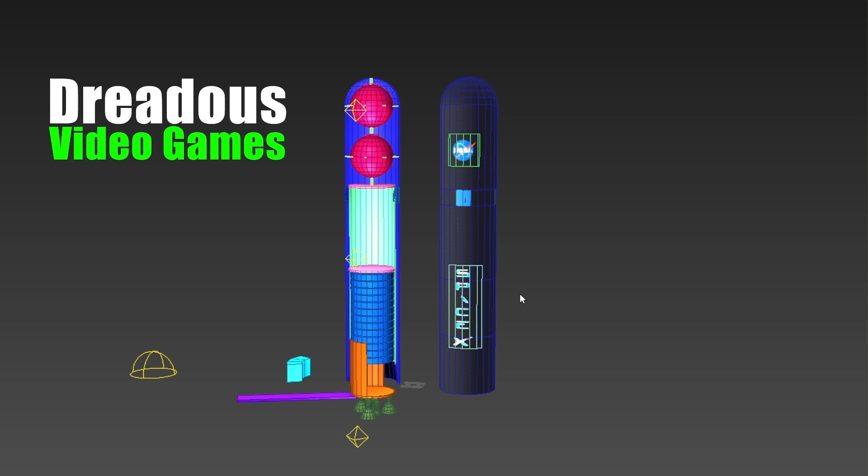I'm surprised as to how many people checked out my last video where I was showing off some cool idea. One of the things that came up in my feeds was an interesting video, and I just want to show it real quick.

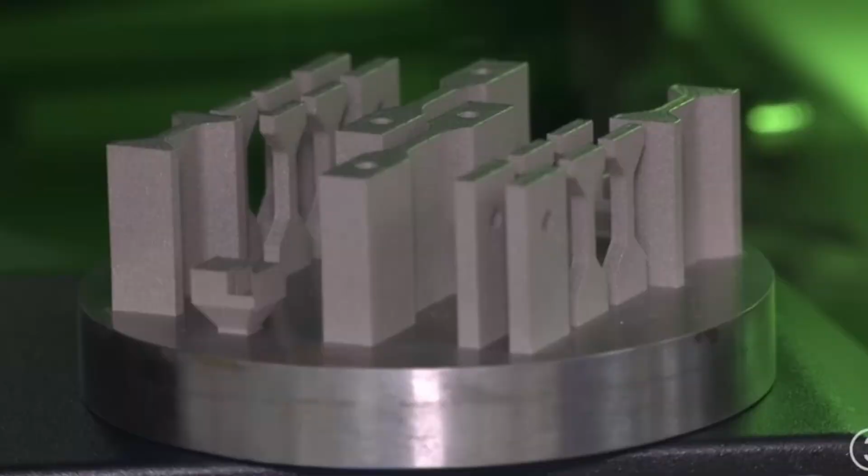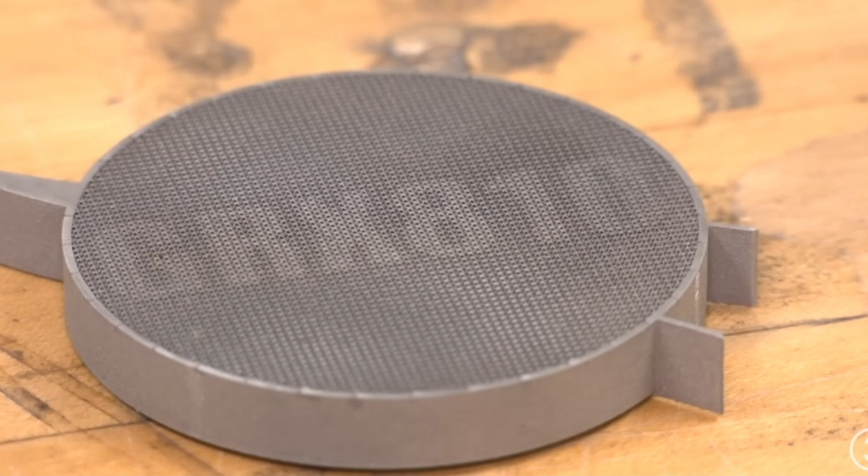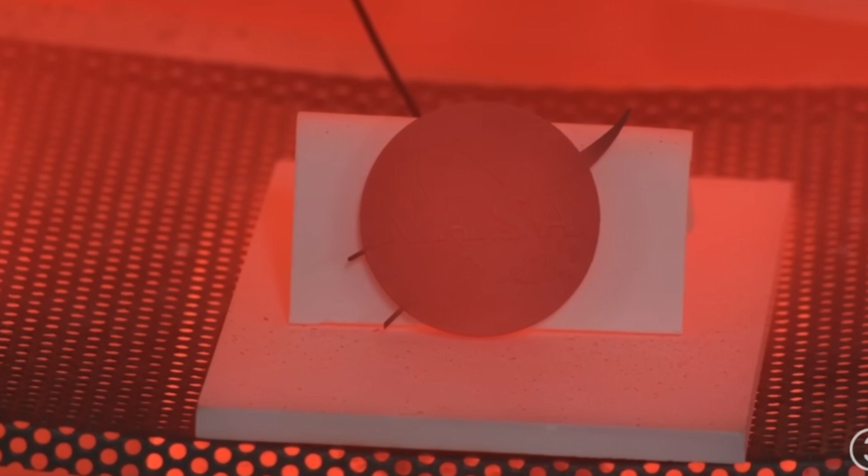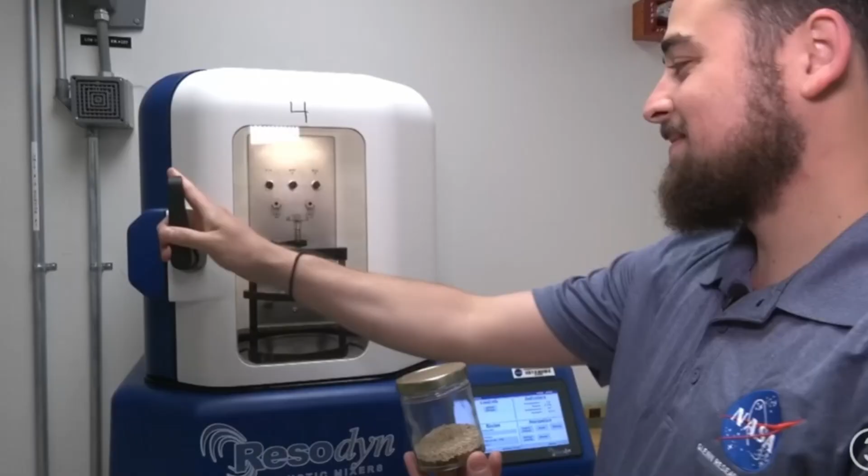NASA Glenn engineers Chris Kantzos and Tim Smith can now call themselves inventors too. They are the minds behind NASA Glenn's breakthrough material, a super alloy developed for extreme conditions of air and spaceflight. It's called GRX 810. In a rocket engine, you can go from 0 to 1,000 or 2,000 degrees within a couple of seconds, so we need a material that's robust and reusable. That's one of the big selling points for GRX 810, it can stand many reuses. It all begins with a metal powder inside a 3D printer. A laser melts the extremely thin layers together. Slowly, a part is formed. The true test is heat. Temperatures that would cause other alloys to fail is no problem for GRX 810, making it ideal for stronger, more durable parts in rockets and airplane engines. The secret? The metal powder is coated with a ceramic before it's printed. But this happens at a nanoscale level. Particles so small they use sound waves to get the correct mixture.

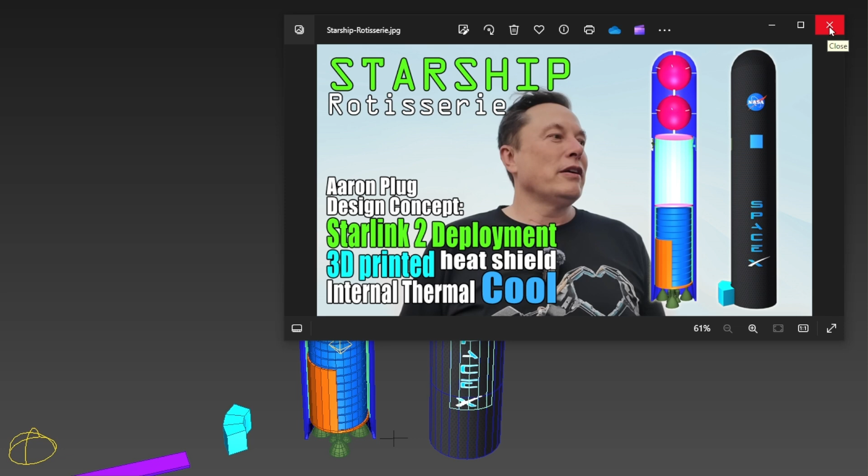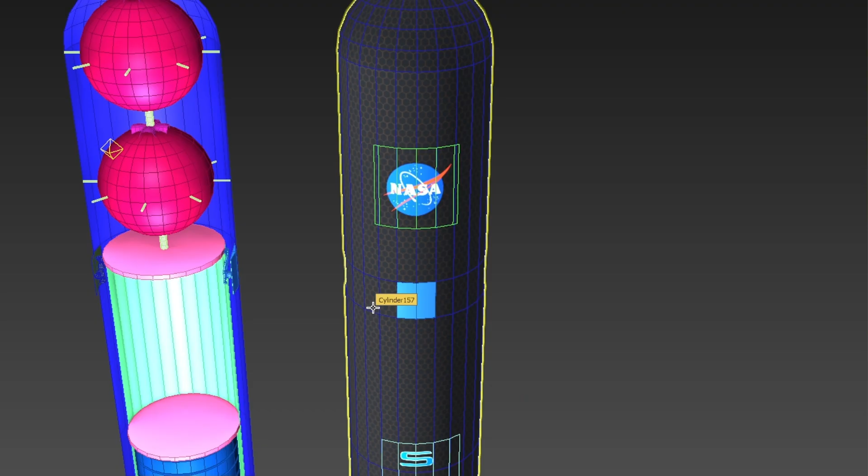So that video ended up coming into my feed soon after I had posted this video on YouTube about 3D printing the exterior of the rocket, or using like a 3D placing device with a 3D printer mixed in. Now I don't know if that particular application is going to work, because they said it was like a metal and a ceramic that's kind of molecularly together. So the metal will probably end up being the weaker point, and I'm not really sure how that would work in this respect. One thing's for sure, speed is a factor when it comes to reuse and being able to do maintenance on these sorts of tiles.

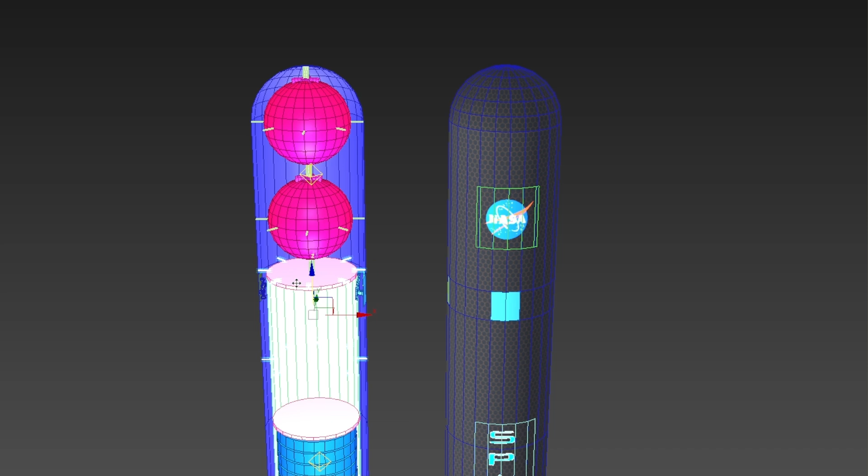Thanks for commenting. Someone mentioned that it looks like the rocket would vibrate while flying, and so I only posted it with these supports, but you could put tons of supports all the way through this thing. I just didn't want to clutter it with supports showing where all the support points would be, but you would end up putting little pins and wires.

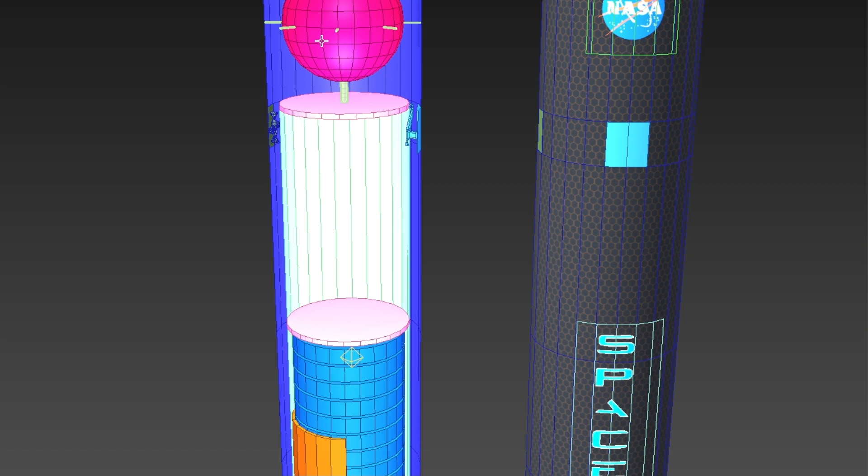The concept would be kind of like a bicycle, like the rim on your bicycle wheel, like this particular rim right here. So imagine the tank is in here, and you just have these wires woven all throughout the interior of the vehicle, holding the tanks and creating a support structure that goes all the way around, ending up like a double layered support wire structure. So I didn't include that.

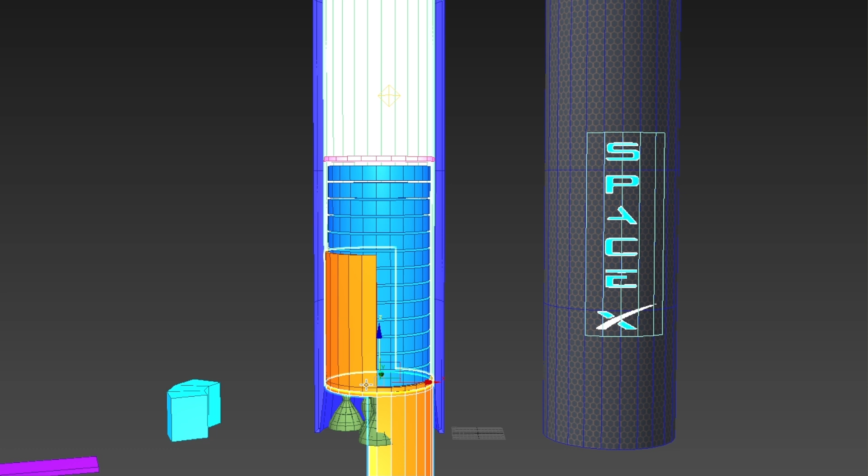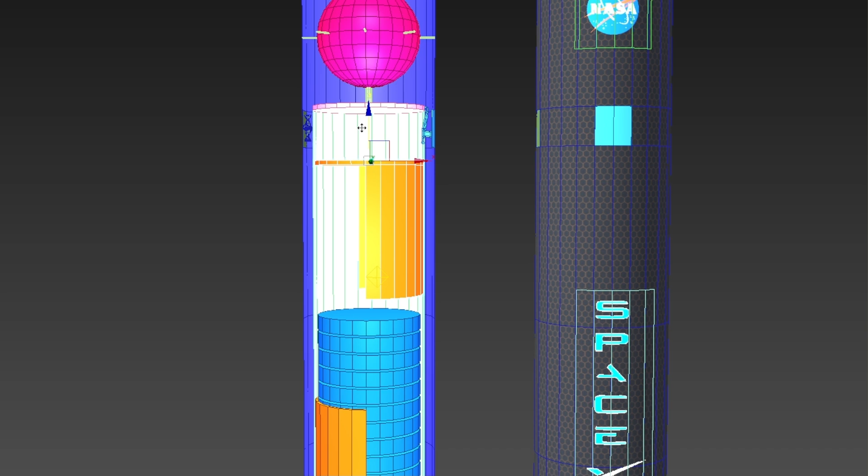One of the things I was curious about, and I have no idea if this is possible, but when I was watching the video I was thinking it'd be so awesome if, let's say, this here is the methane tank, and this could be a piston that pushes the methane tank and empties it. By the time you're in space, you only have a little bit of methane left for the final burn. That would save the helium you'd need to pressurize the tank.

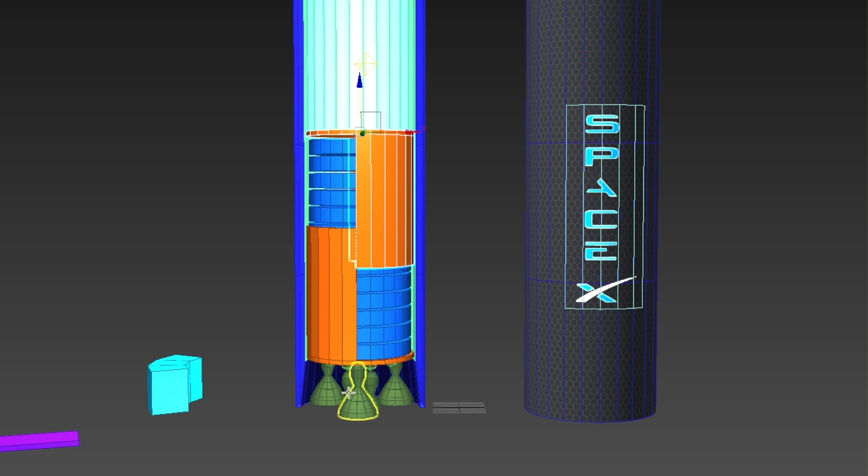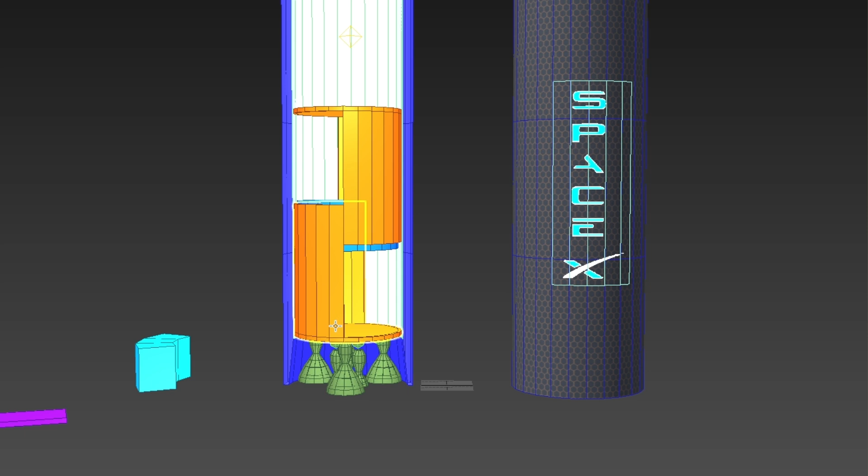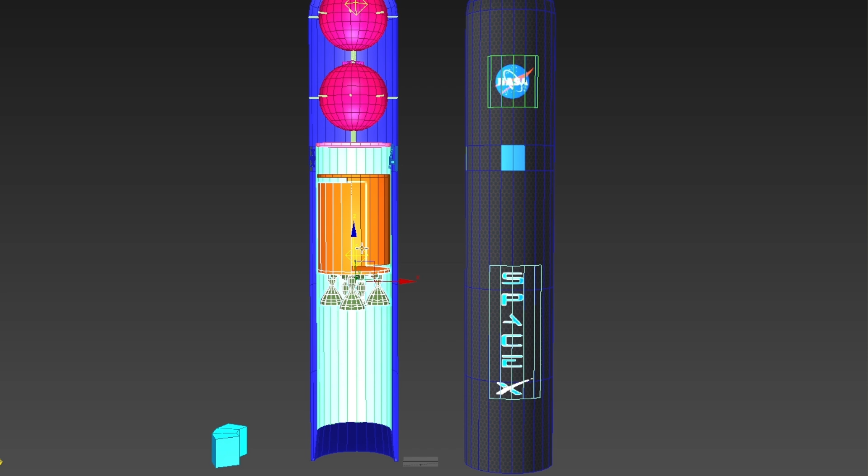The idea is you'd use it like a big piston. Also, Elon mentioned that the rocket wants to come in butt end first because that's where all the weight is. I was thinking that once all these are out of here, this whole thing—so if I took the payload out, or at least the majority of it, and moved this up, you could maybe position the rocket bells further in, and then this whole thing could slide, acting like a piston. Once it gets up there, we leave that one there, and it's flying in, and this could go up and down inside the chamber, allowing the unit to use it as weight or balance or counterbalance.

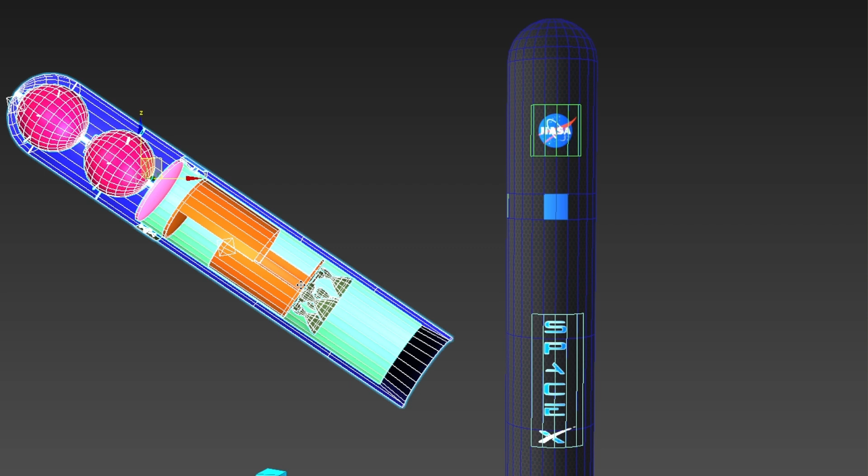So this could be up in the body, and that would end up pivoting the whole rocket, moving it further up into the chamber in order to move the center of mass up and try to get it to tip over and come in on the Earth at this angle. So this is all speculative, but I'm going to show you the next iteration of this design.

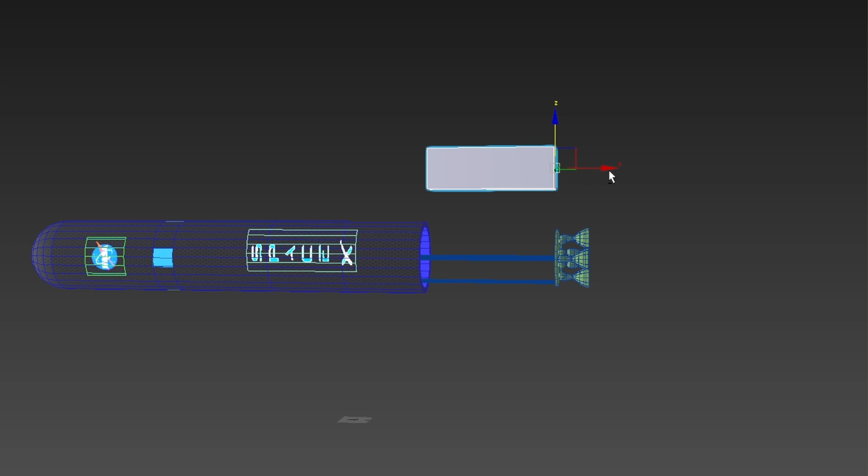We're going to talk about the Starship, and the real question is: is this actually a Starship? When it's in space, it goes sideways. So here's the payload - this thing comes out to about there, and then the payload comes up and out of the machine. So this is a 5x5x15.

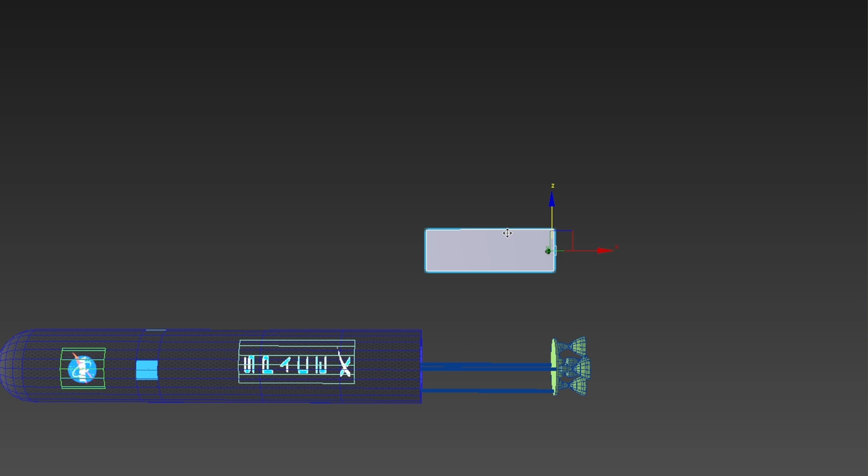Now, you're in orbit, which means this here is not necessarily - this is a construction piece. So another vehicle, like a little vehicle, will come along, grab this, and then we would start creating something with it. Now this may seem like just a brick, right? Then this thing goes back in, goes back down to Earth, and it's gone. But now we have this brick.

So this brick is a 5x5x15. Now what are we going to make with this brick? Well, this is a module.

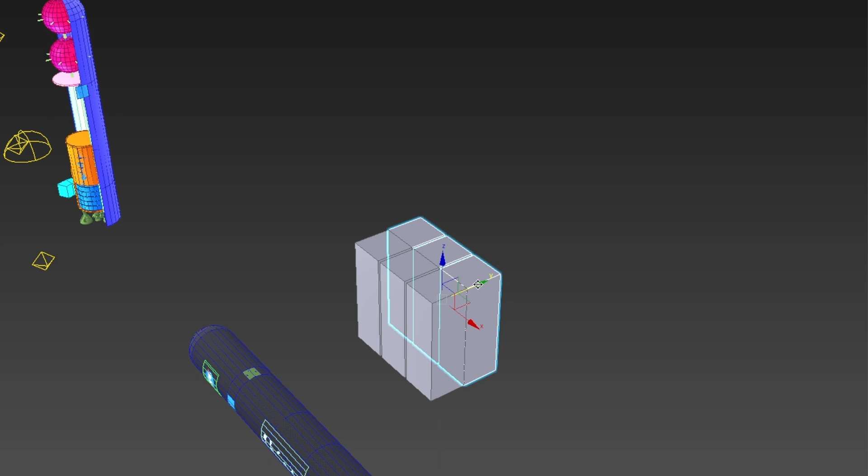So I'm going to go and make a 3x3, then I'm going to make a 9 square module. Then I'm going to take the 9 square module and build it 15 times.

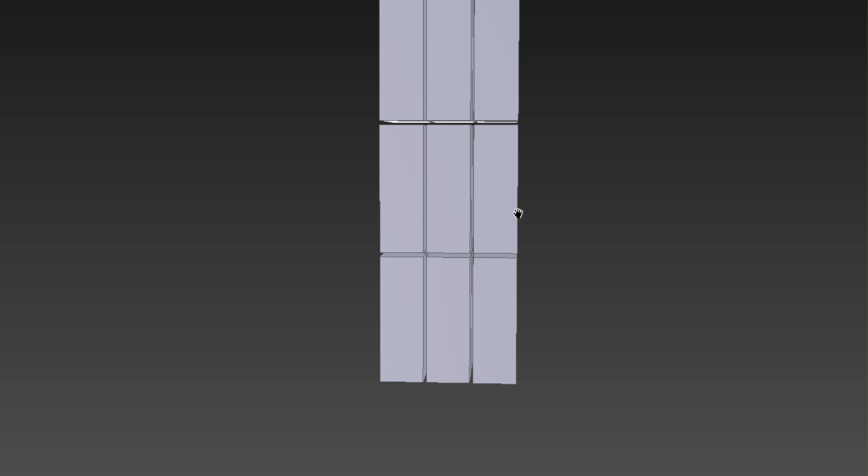And this is what's called Starship. Now, it doesn't quite look like Starship just yet. And this is a Starship, which I know looks like just a bunch of boxes - 519 boxes to be exact.

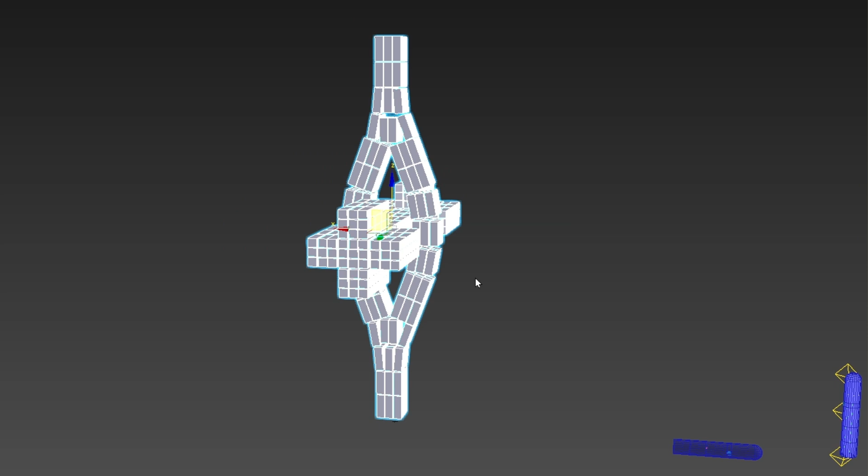So when Elon said he wants to see 1,000 starships go to Mars, well, here's 519 of them - at least the cargo's worth, the ship, and all the stuff that's in it. Now, you'd probably have a bunch of starships stuck to the outside.

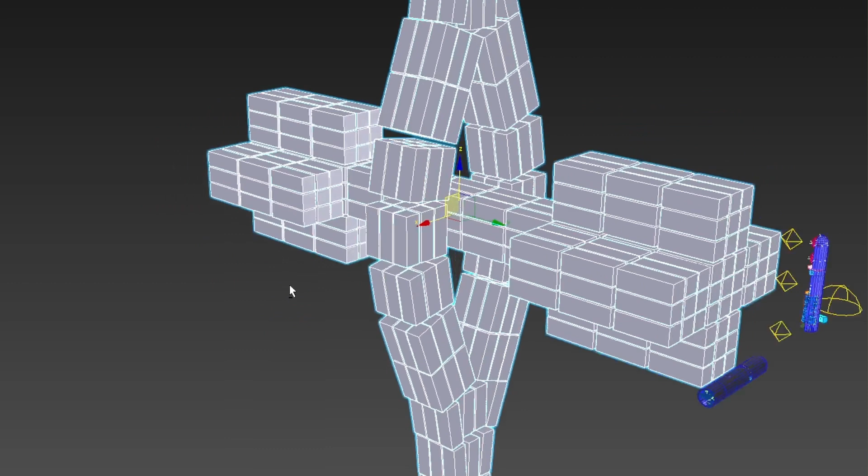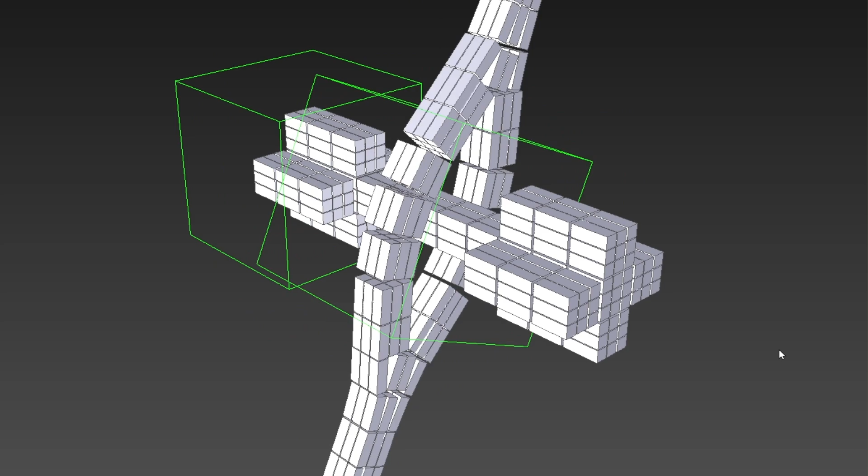And you're probably wondering what this shape is, because it's an odd shape. But if you have a close eye, you can see, and then you can make this. So you end up with about 519 pieces of cargo or habitat delivered into orbit.

And then you create a ship like this, so this way you can have gravity. It's kind of like if you took 2 towers and stuck them together and then rotated them. So at the far end, it's going to be like around Mars gravity.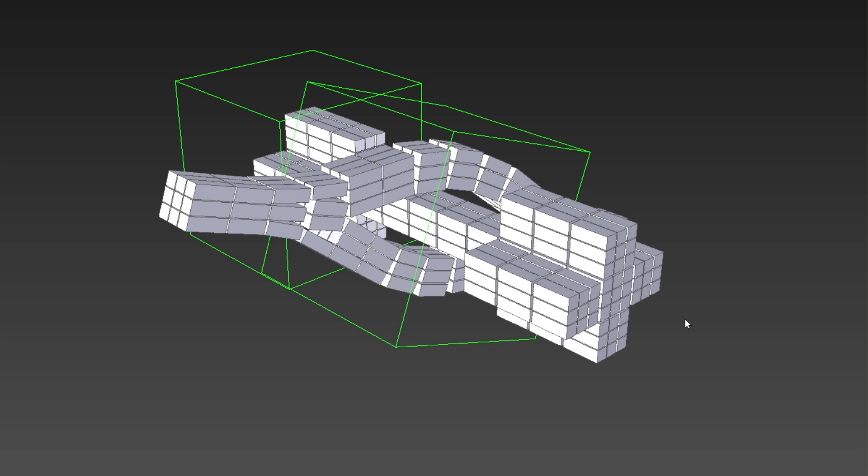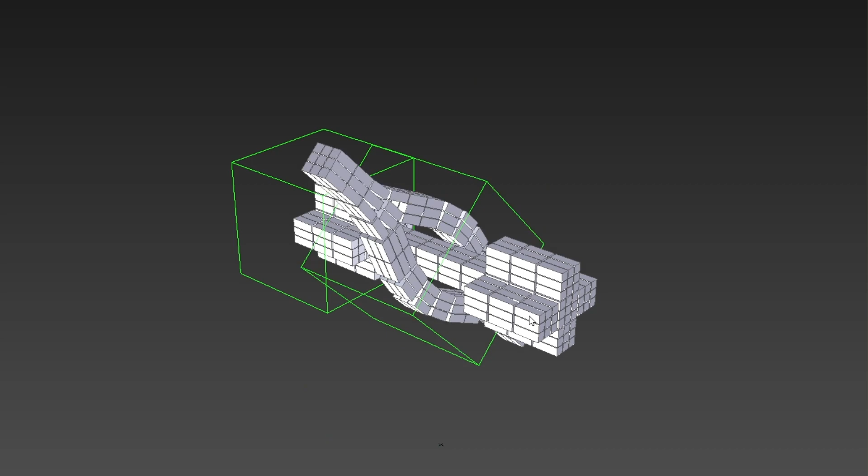That's the beauty of this - you can go and create arrays of compartments and mass produce all the pieces just by repetition. And then the front would end up being basically cargo. So you've got your thrusters, plus fuel and cargo, and then you would have a bunch of ships.

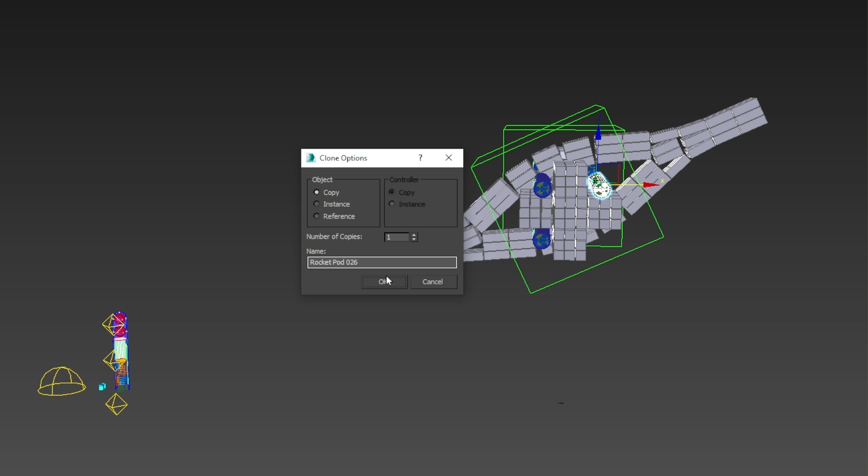Let's throw another bunch in - in fact, here you could just hook on the starships, and then they can power the ship. And this is what I call a starship. And this is completely doable with the current technology.

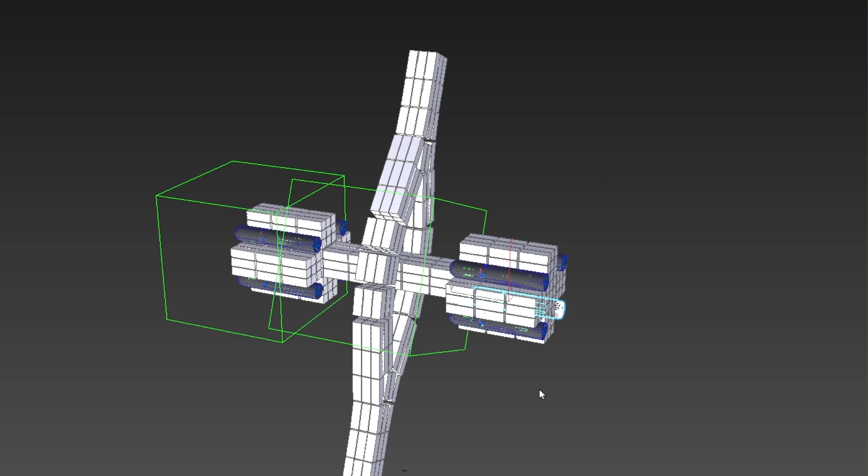Head to Mars, park in orbit, and then start delivering all your stuff down to the planet. All right, well, there you go - there's the ship. Now, if you look at the back here, you've got the starships mounted in here. You could probably place them on these sides as well, so you'd end up with like 8 of them on either side. Oh yeah, and then these are probably facing the wrong direction.

So if these were facing the other direction, then the whole ship could speed up, go to Mars, and wouldn't necessarily have to turn around in order to slow down. And then if you look at it, like if you're sitting there orbiting the planet like this, it's pretty easy to just stay in LEO around Mars and around Earth and just transfer between the two every 2 years.

And this is meant to be kind of like an aircraft carrier amount of people - so like 5,000 people, I guess, or at least that's the idea. Something that's like a decent sized crew. So yeah, there you go - that's my starship design. And this is an actual starship, right?